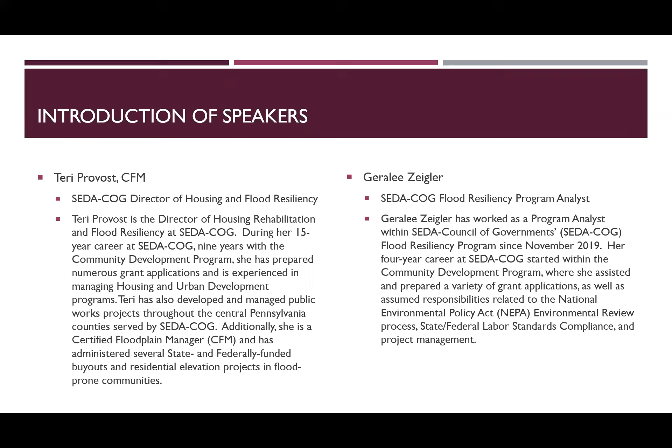Also joining me today is Teri Provost. Terry is the Director of Housing Rehabilitation and Flood Resiliency at SEDA-COG. During her 15-year career at SEDA-COG, 9 years were within the community development program. She prepared numerous grant applications and is very experienced in managing housing and urban development programs. Terry has also developed and managed public works projects throughout the central Pennsylvania counties that SEDA-COG serves. So we do serve an 11-county region here at SEDA-COG. Additionally, Terry is a certified floodplain manager, or a CFM, and has administered several state and federally funded buyouts and residential elevation projects in our flood-prone communities.

The focus of today's webinar will be specific to 6 residential flood mitigation efforts, along with their respective importance. Each of those 6 flood mitigation efforts will explore the benefits and the drawbacks, items for consideration when evaluating the pros and cons for these efforts, essentially. These 6 mitigation efforts will be considered as non-structural mitigation types versus the structural, meaning our focus today is on the residential side of what people can do on a personal level to reduce their flood damage by altering their property or obtaining flood insurance. We will not be focusing on the structural level for flood mitigation efforts today. Some examples of structural flood mitigation types would be those of bridges, dams, levees, dikes, or flood control structures.

We do have some photos at the end for some of these 6 flood mitigation efforts as well, for those who may want to see some photos. But now I will be passing it over to Terry to start our discussion on the non-structural considerations. Thank you, Geralee. There was going to be a little bit of time where the FIRM took to load, but I am happy to be here today to kind of go over some of these non-structural considerations.

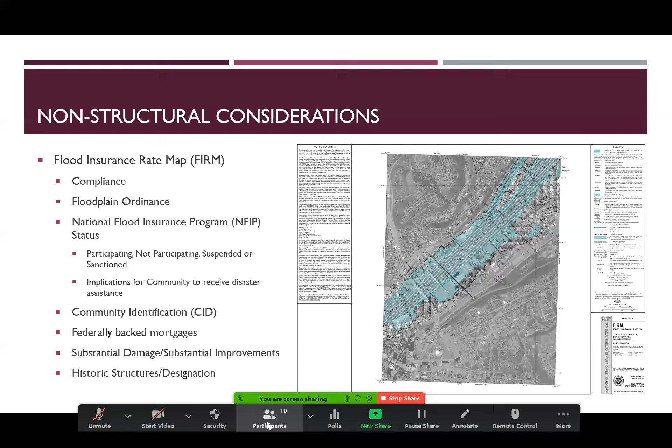That ordinance has a lot of teeth and enforcement behind it, but the enforcement is essentially to ensure that they are using the FIRM that you see on the right-hand side for compliance matters. So there's a couple things to think about. If your municipality would like to use grant funds to assist you as a property owner, they must be participating in the NFIP, the National Flood Insurance Program. So that means they've adopted a floodplain ordinance.

Additionally, with other grant funding sources, there's legislation under the National Flood Insurance Program that mandates that a community, to have federally backed mortgages, must be participating in the National Flood Insurance Program. And grant funding agencies like FEMA and Housing and Urban Development, HUD, mandate that if we use grant funds in the special flood hazard area, they're actually an NFIP community as well.

So each community that is part of the National Flood Insurance Program, in particular in Pennsylvania, would be municipally driven. So each municipality, if they're in that program, has a community identification number. You can actually go right to Google, type in community identification number under NFIP, and you can find that code. I believe it's a 6-digit code for the community identification number.

So in a nutshell, if a community is suspended from the National Flood Insurance Program, then they could call back all those federal mortgages. If you have a mortgage on your home and your community has been suspended from the National Flood Insurance Program, there are large repercussions to the entire municipality and their residents.

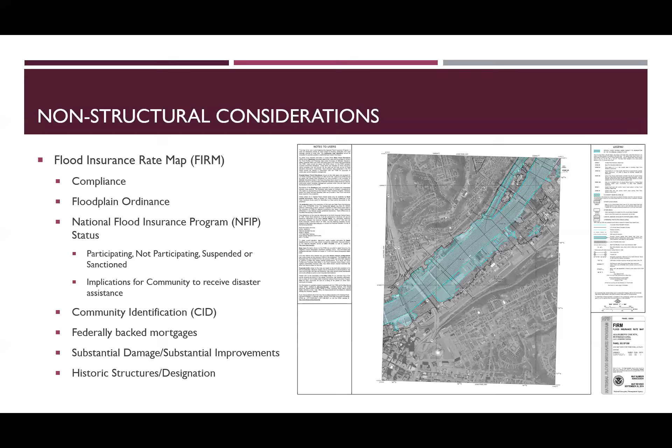So with flood insurance, since 1968 and the NFIP authorization, we have been doing flood insurance very similarly throughout the years. There's been some changes with the Biggert-Waters Act, and then again with the Homeowner Flood Insurance Affordability Act under the NFIP program. However, I believe this was October 1st, Risk Rating 2.0 went into effect. We were hoping for it in the last 2 years, but it finally went into effect in October.

The biggest thing to take away from the previous slide and this slide is essentially that, yes, there's a two-prong approach with flood insurance. You must use your FIRM, your flood insurance rate map that we showed you on the last screen, for compliance. However, for the insurance underwriting portion, we are now using Risk Rating 2.0. That really updates the methodology and how we implement the underwriting of your flood insurance. Before, we could pull down the flood insurance book and calculate the premiums of your structure.

We can no longer do that with Risk Rating 2.0, but we have an example for the zip code 15201 for the Pittsburgh area below here on the bottom left. And there's been a lot of discussion about elevation certificates.

And I have to tell you, I have been a huge supporter of, with flood maps, if you're located in the special flood hazard area and you believe that you really should not be, or you have no idea what your risk is or your insurance premiums, why they're the way they are, we have always been supporters of getting an elevation certificate. However, with Risk Rating 2.0, that is still a question mark that we have.

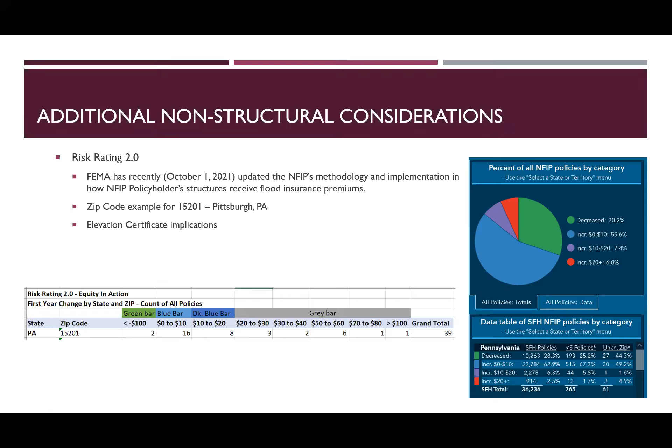So the 6 flood mitigation types and techniques that we're going to talk about today include a couple things. Some of these are my favorites. I've seen a lot of these. Others are pilots that we're trying to do in the state of Pennsylvania currently. Raising utilities and mechanicals. That is pretty simple to do. We'll go through the drawbacks and benefits of that as well.

And based on the old insurance premium ratings, it was a 0.06% reduction in your loaded calculation of your insurance, meaning that you would save some insurance, but ultimately you're still located in the special flood hazard area. We're also going to talk about basement infilling, and I think we might have at least a case story to share with you on that one. Abandoning the first floor, structural elevation, relocation of structures.

And the last one is the one that we're trying to pilot a little bit in the Commonwealth under grant programs currently, the mitigation and reconstruction. This is where your home might be sitting in the special flood hazard area, but you may have a part of your parcel that is located outside of the regulatory floodplain. That 100-year floodplain is what we mean by the special flood hazard area.

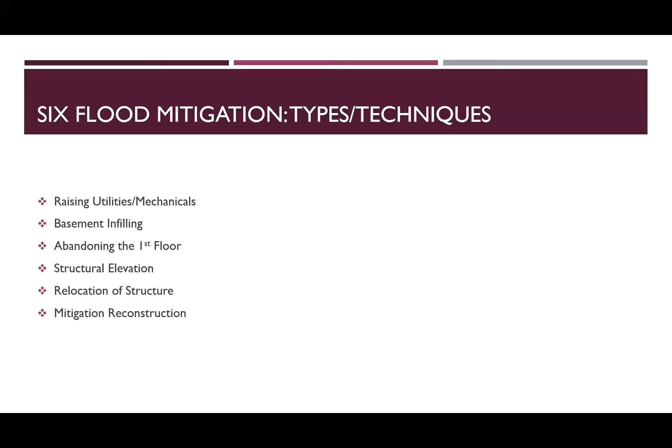If your parcel is large enough, or pieces of your parcel, even if it's small, are located outside of that regulatory floodplain, taking your home and actually moving it is what we're looking at. So raising utilities and mechanicals. There are some programs that will allow us to use grant funding to raise utilities and mechanicals.

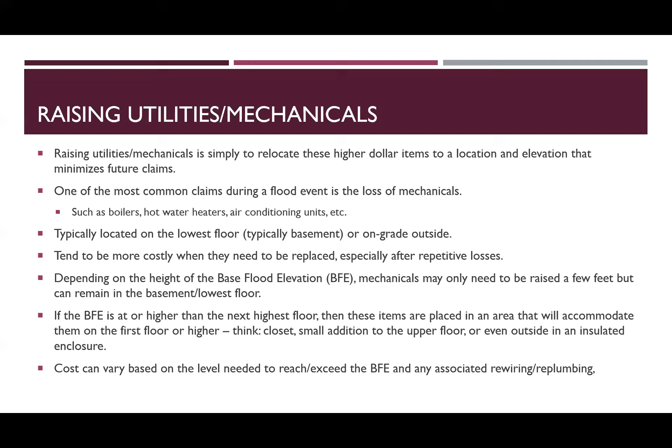The best program I have seen to do this is through the housing program HOME, which is a HUD program. HOME allows full-blown housing rehabilitation along with elevation of utilities and mechanicals in the special flood hazard area. Beyond that, this is typically funded with private dollars. A homeowner may say, yes, my electrical panel is located below the base flood elevation. I'd like to elevate that because I lose it year after year after year.

The benefits could reduce future losses to items that are costly to replace repeatedly. The option to help homeowners stay in their homes and maintain the same exact tax base. The drawbacks are that you're still located in the special flood hazard area. You're not going to see large premium savings, but you're going to see the ability to bounce back from flood events very quickly because you no longer have to fix the same things, your hot water heaters, your electrical panels, and those types of things.

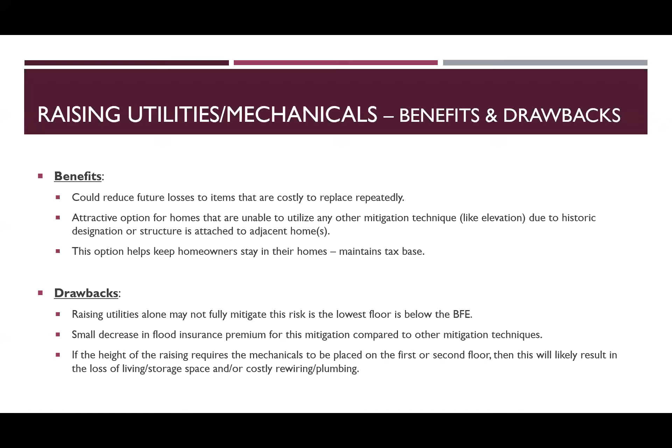Basement infilling, Shirley, I think it's back to you. Yes, it is. Thank you, Terry.

So moving on to basement infilling, when we do this technique, it involves abandoning your lowest floor and then backfilling it to the necessary height required to make your next highest floor the new lowest floor. So we talk a lot of back and forth about this floor and that floor.

But after you would abandon your basement and relocate any of your utilities, your mechanicals, your foundation slab would be perforated to allow the flood water to move freely in and out of your foundation. Then your basement would be backfilled, compact soil, pea gravel, flowable fill to that required height, and then capped with concrete so you have an impermeable slab.

What you get is an area between the new slab and your next highest floor that would create a crawl space, provided that you would get the proper venting to allow the passage of floodwaters to move freely back and forth. Then your next highest floor would now become your lowest floor. So you would be above that BFE.

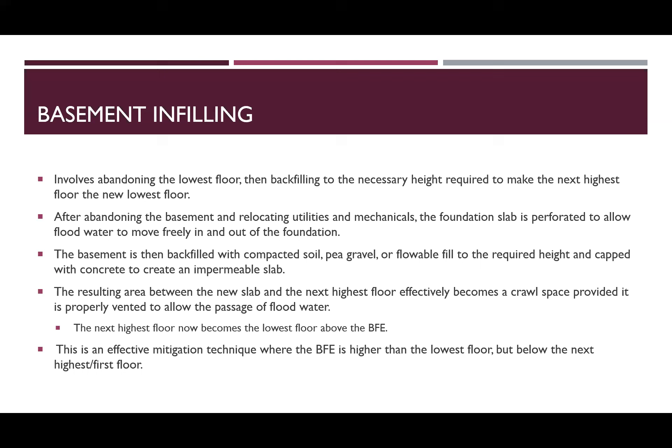So this is an effective mitigation technique when and where your BFE is higher than the lowest floor, but below that next highest or your first floor. So your benefits, this could be a desirable option when appropriate for homes whose construction would be very difficult to elevate. There are some homes that may not be structurally sound to be lifted to that appropriate level. So it would be keeping the home there, but still having that flood water flowing freely.

Again, this is very attractive for historic homes or historic districts, which would help maintain your historic integrity and the aesthetic character. In communities where you have historic designation, if you elevate a certain amount of homes, you would kind of get a different effect of up and down homes. So for historic homes, it would still allow them to be close to the ground, but flood mitigated. The disturbance to homeowners would be very minimal other than your loss of storage space. And it's very desirable for our municipalities because it retains your tax base in keeping that home occupiable.

Now, our drawbacks would be your loss of storage space in the basements. I know here in central Pennsylvania, we really like our basements and enjoy our basements. And then we would need to accommodate some elevated mechanicals on the upper floors. So having that M&E, whether that be in a closet or another space of the home, you would then lose that potential storage space. So we consider that a drawback.

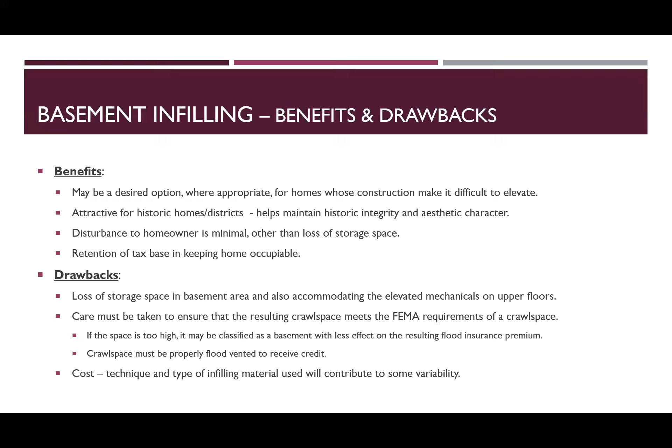Care must be given to ensure that the resulting crawl space meets the FEMA requirements of a crawl space, their actual technical definition. So if the space is too high, it may be classified as a basement. That would give you less effect on the resulting flood insurance premium that you may be going after. And the crawl space must be properly flood vented to receive that credit for the FEMA requirements of a crawl space. Another drawback could be cost. With a technique like this, certain types of infill material that are used could contribute to some variability.

On this, abandoning the first floor. So this is similar but separate to your basement infilling. Your lowest floor, which would be at or near grade, would be abandoned, and then your living space would be moved up to your next highest floor. That abandoned floor is then converted to open space that is compliant with all FEMA regulations, including the proper flood venting and non-conversion compliance to livable space. If you are abandoning your first floor and you have a basement, it can be infilled in the same regard as we previously mentioned on basement infilling.

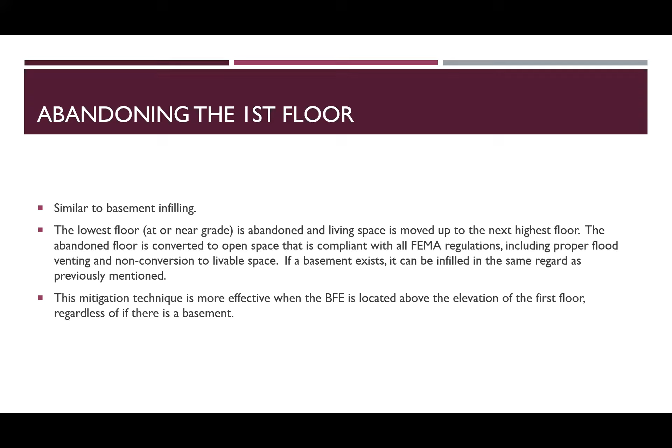This mitigation technique is more attractive when you have the BFE, your base flood elevation, located above your elevated first floor, regardless if there is a basement. So our benefits and drawbacks here, again, something that we hammer home is retaining that tax base. It is so important to a lot of our communities. Abandonment of the first floor is typically less expensive and less disruptive to the homeowner, as you have no elevation. So you can still live in and occupy your home and not have to leave that structure, whereas you would in an elevation situation.

A benefit, if allowable, additional floors could be added to the top of the structure to offset the loss of living space. Abandoning a floor may negatively impact the structure's historical designation. It would have a minimal impact on the aesthetics of the community, though. That could be averse to that pure structural elevation.

A drawback for abandoning your first floor is that loss of living space, especially if you are unable to add any additional floors to the top of the home or another top floor space of the home. Basement infill would need to be completed to the compliance of the FEMA regulations. An abandoned floor would need to remain open, and the living space would need to be compliant.

On our last slide here, and I do apologize, we did not have a ton of room on these slides, but we do have pictures toward the end of a home locally here, close to where we are in Lewisburg, Pennsylvania, where the home actually had the basement infilled, and they additionally abandoned the first floor of this home. It is a beautiful, beautiful home. We were able to tour it this summer.

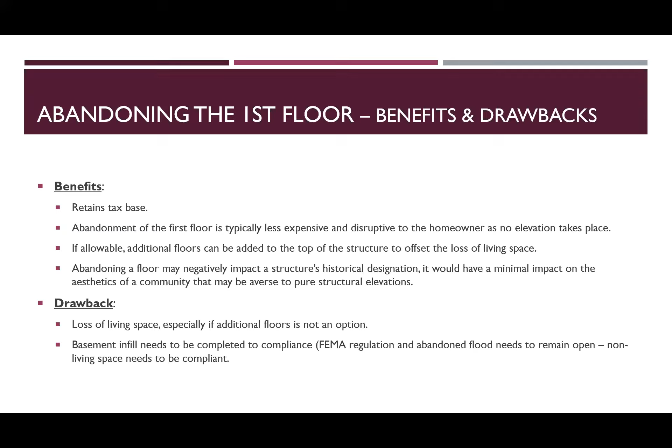Where it used to be occupiable space, it now could potentially be a garage, and they also have added a bathroom in there, as well as stairs that then go to the second floor, the next highest floor, their livable space. And I can't remember if the deck portion of the home was added on when they had abandoned the first floor. But again, it's truly beautiful. We'll make sure that we point that out to you at the end of our slides.

And now we're going to move on to the structural elevation. And with that, Terry, I'm going to pass it back to you. Thanks. So structural elevation has to be one of my favorite non-structural mitigation types. We see a lot of structural elevations, and we're hopeful that you have seen quite a few.

We see these a lot, obviously, in Louisiana, piers and posts, but in central Pennsylvania and across the Commonwealth, we don't have a lot of that coastal surge here. We see a lot of concrete masonry units, not posts and piers. So sometimes if you drive by, other than it looks a little bit higher than the rest of the homes, you may not actually realize that it's an elevated structure. These can be accomplished privately. You can fund these structural elevations on your own.

The biggest caveat about elevating a structure is knowing that the first thing you might have to deal with beyond getting it designed and going through the permitting process is really zoning. The biggest lift on a structural elevation from the homeowner perspective or the grant funding agency is to make sure that you're thinking about your setbacks and your variances. Some communities actually have height restrictions when you elevate a home.

So what does an elevation look like? There's several different companies that provide that jacking of the home. Basically they lift the home from the foundation and they jack the entire structure above the base flood elevation. At this point, one of the most important things to do is to have your codes official and your floodplain manager come out and ensure that it is elevated above the base flood elevation.

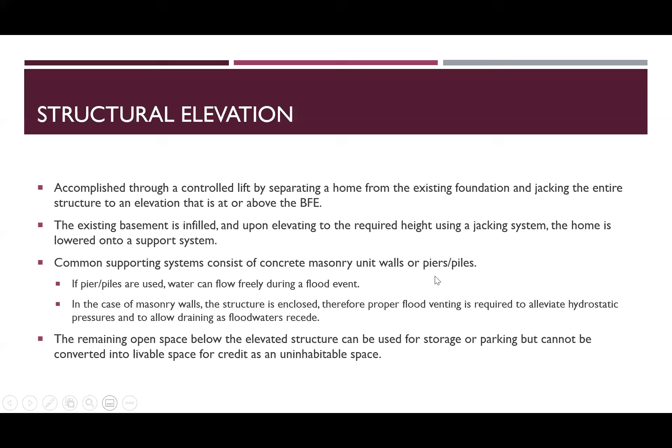A lot of vents we see are engineered venting, and there is a requirement in ordinance of what kinds of venting per square foot that you must use. The remaining open space below the elevated structure can be used for storage or parking, but cannot be converted into any type of livable space. It has to be uninhabitable. And if you're using any type of FEMA grant funds, there are deed restrictions that go along, including that it must be uninhabitable space, even if you sell your home.

The benefits to a structural elevation, there's a lot of those. There's no loss of space to the homeowner. The homeowner actually doesn't have to move out their materials. You can leave everything where it was, your washer and dryer, your couch. You yourself would have to be displaced during that event when the house is being elevated, but you are likely displaced or relocated out of your home for less than about 60 days. So that is a drawback, but you don't lose any space to your home.

Most high dollar items that would be adversely affected during a flood event, like your hot water heater, your air conditioning unit, your electrical panels, are all elevated when the home is elevated as well. It's part of the design work that would take place. Everything will be above the base flood elevation. It retains that municipality's tax base, and the structure is a lot more marketable, and premiums are truly more affordable. We have an example a little bit later.

I think it's a little mind-blowing to see your house is still located in the special flood hazard area. You look on a map for compliance, you're still in the special flood hazard area. You still have to be in compliance, but you are in compliance because you have the flood venting, you're elevated above the base flood elevation. And so it's a win-win for the municipality and the homeowner.

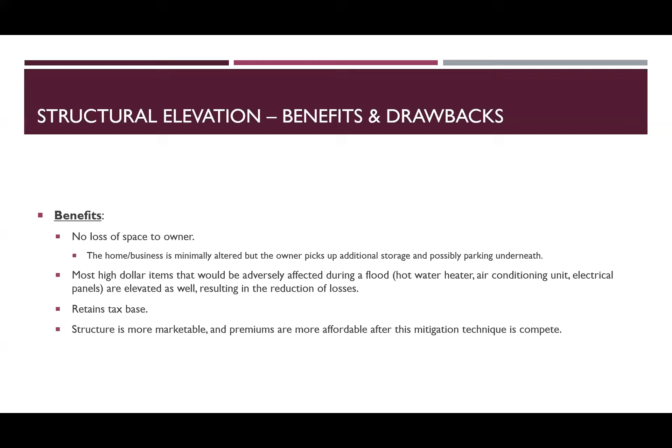The biggest downfalls are really the EMA side of things, your loss of property and life. They're not zero mitigated, meaning that you still could be trapped in your home during a flood event. You're still located in the special flood hazard area. Your house is very high, but if catastrophic events do happen, if you need to get out of your home, you are putting yourself and the emergency managers and rescue personnel into compromising situations. So the major drawback is that it is a little bit of a high cost if you're doing this privately with your own private dollars.

Proper elevations require careful consultation with an engineer, and the actual shoring and jacking of the structure is best done by experienced specialty contractors. And usually you will see this niche. We have probably a half dozen contractors that I'm very familiar with that do this type of work across the Commonwealth.

Grant funding is the most common for homeowners who carry the National Flood Insurance Program. And this is through the Flood Mitigation Assistance Grant that your municipality can go after for funding, but you must be an NFIP policy holder in order to play in the game, and it has to go through the municipality to PEMA and then FEMA, because the National Flood Insurance premium pays for part of that grant, the Flood Mitigation Assistance Grant. So if you have private flood insurance, there is not the Flood Mitigation Assistance funding available to your municipality, but it would be available to those residents who have the National Flood Insurance Program premiums paid in.

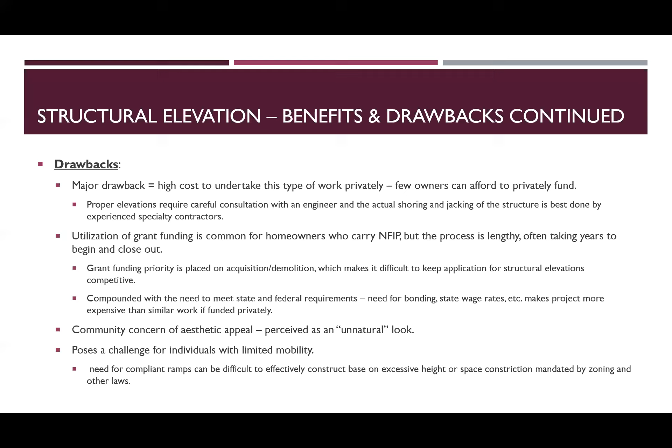So this is a structural elevation example, and I have to be very transparent here. This was based on the insurance premium calculations that we could do prior to Risk Rating 2.0. So this might look a little different in today's world. As of October 1st, Risk Rating 2.0 went into effect, but prior to that, we could actually do all the calculations on flood insurance. So we could take a pre-FIRM structure in the regular program, look at where the lowest floor is on the base flood elevation, and then start elevating that structure with the concrete masonry units with proper flood venting.

And what happens is we have some cost variations here. If you did this privately, you're looking at between $40,000 and $80,000. If you do this with federal or state money, you're looking at about $100,000 to $200,000. The effect on an NFIP policy prior to elevation was $4,093. That's what they were paying every year on flood insurance. After the elevation, they were paying $530 per year on their elevated structure, which is a huge savings.

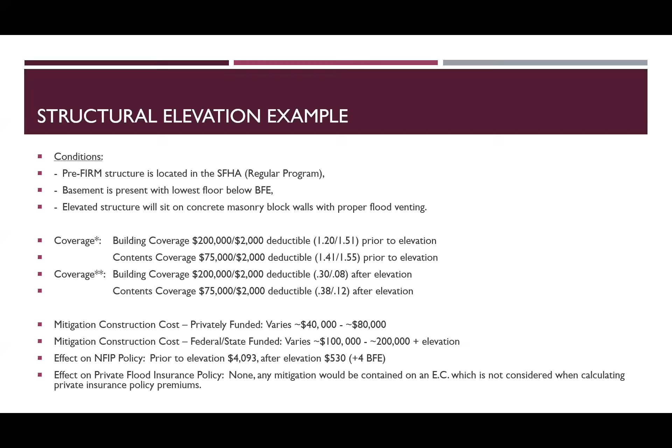So any mitigation would be contained in the elevation certificate, which is not considered when calculating private insurance policy premiums. So what we're trying to say here is that this is all considering national flood insurance policy premiums, not private insurance. Sometimes private insurance does not even look at an elevation certificate. It is relatively new, that private insurance market, but they are starting to open up more and more initiatives under that private market to take things like elevation certificates into account.

So here's just some illustration purposes if you really want to get in the meat of how to actually do a calculation previous to Risk Rating 2.0. Prior to the elevation, you will see the total amount due was $4,696, and after was $598. And the interesting part here is that you'll see where some of these premiums really come down. Basically, on your building side of things, your premium calculation went from essentially $2,834 just for your basic coverage on the building to $292, which is crazy.

Now you have to add in your deductible, your ICC, which is increased cost of compliance. If you have the National Flood Insurance Program, you pay for the increased cost of compliance. It's a rider on all NFIP policies. And that ICC cost is calculated based on the premium dollars, and that increased cost of compliance really means if you got substantially damaged as a structure under NFIP, and your municipality is going to mandate you to bring your home into compliance to elevate that home, the ICC actually helps pay for that elevation of your structure to come into compliance. That is maxed out currently at $30,000.

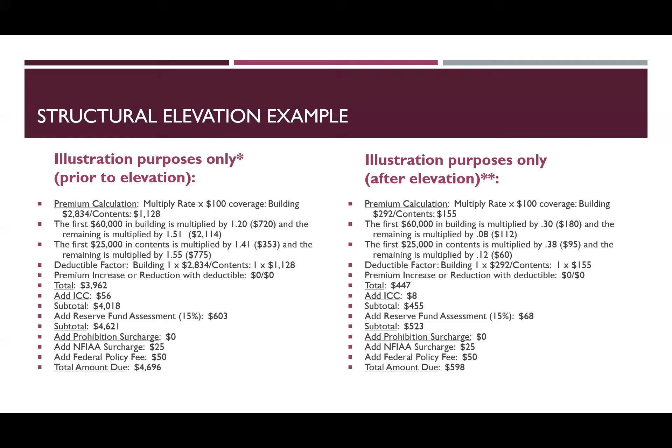Relocation of a structure. I think this is also me. Or is it you, Jerry? I'm going to toss it back to you. Thank you. Yep, it's me.

So stepping away from our structural elevation side of things, the consideration of relocating the structure. So in a relocation of a flood-prone structure, it's a form of flood mitigation accomplished merely by moving your structure out of the floodplain. A key piece here, as we keep hitting on, is it retains your tax base. However, you can hit some expensive costs as well as some constraints that we will touch on in the next slide.

If this is an attractive option, something that makes sense for your structure in relocating it, you could also consider a LOMA, a letter of map amendment. Now, after the structure is relocated, you could go through the application process in submitting certain mapping, surveying information to FEMA. What FEMA then does is issues the documentation officially removing your property and or structure from the special flood hazard area, the SFHA. So a person that would be applying for a LOMA, they would likely need to hire a licensed land surveyor or registered professional engineer or architect to prepare an EC of the property.

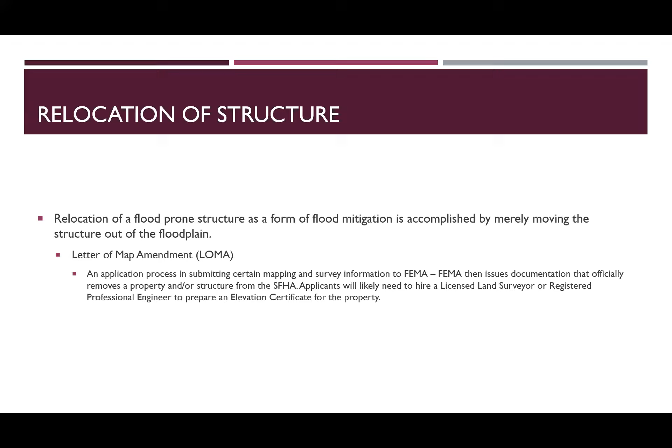With this, again, it preserves the tax base provided that the relocation is still within your municipal limits. Relocating can be used to mitigate a historically significant structure, again, by maintaining that historic value and your aesthetic integrity. So it would just be taking that structure from over here and moving it there. It wouldn't be changing it, again, like Terry had said, in a structural elevation. So it keeps that aesthetic look, it keeps it appealing.

A drawback when we consider the relocation of a structure, again, it could be an attractive mitigation strategy, but relocating is extremely expensive, we find. It's a procedure that requires careful coordination, and you would really need some specialty contractors, folks that know what they're doing. You put a lot of hope and faith in those individuals or firms that would be moving that structure for you.

Relocation has some limitations. It requires that you have a suitable location outside of the SFHA, your regulatory floodplain. Many of the affected structures, what we find here in central Pennsylvania, sit on what we call a postage stamp size parcel. So we have limited space where you can relocate that structure on that same postage size, square rectangular parcel. Furthermore, many parcels lack the necessary elevation change to move the structure out of the floodplain and above the BFE. So simply lacking enough space outside of the SFHA.

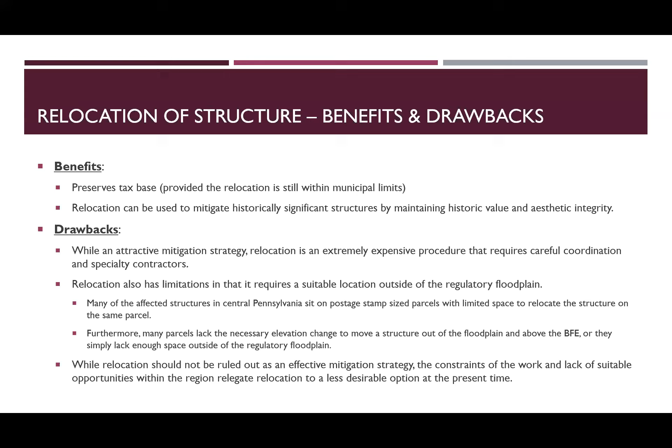Not that we want to be naysayers here, but while relocating shouldn't be ruled out as an effective mitigation strategy, it's just knowing that you have certain constraints and items that need to be considered for the work, and lack of suitable opportunities within the region relegate relocation to a less desirable option at the present time.

And Terry, I believe this is back to you. Sure. And this technique is totally different than what Jerry was just talking about. Mitigation reconstruction is actually when you have some sort of structure on a parcel of land, and you're going to either completely destroy it, demolish it, but you're going to remove that building or partial building totally out, demolish it, clear away, and then you're going to bring in new housing on the same parcel outside of the special flood hazard area.

Now, I have seen this done. This was actually done, and I'm sure you all may have seen this as well, but you'll actually see a structure, and it could look from the outside that it's in decent shape. However, there are some benefit cost analyses that are done, especially with grant programs and your own private dollars. Does this make sense for me to do this? In the federal eyes, there's that benefit cost analysis that says, does this make sense for us to grant funds to this activity?

Sometimes you will have a home that has so many code deficiencies that may look okay on the outside, that's located in the special flood hazard area, but ultimately to elevate that home, it's going to be more costly than just to demolish it and bring in per se a prefab building with the CMUs, the concrete masonry units, built above the BFE, and then lay the prefab up on those CMUs.